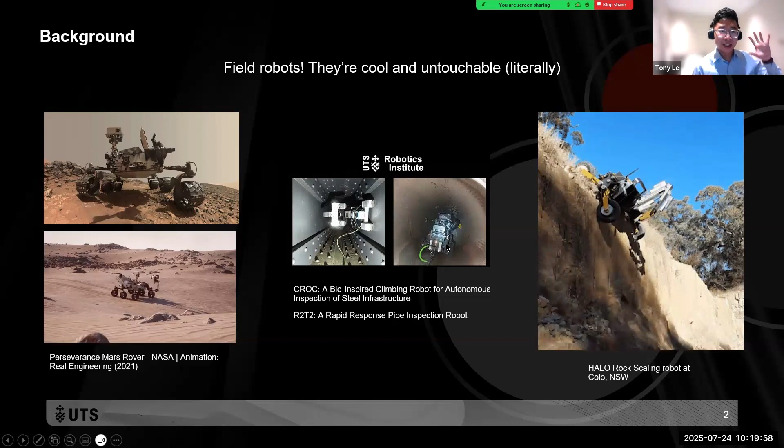Most of the time, it will come in some form of teleoperation at different levels, either directly controlling the robots or giving them more strategic commands. But since they are in the field, in the wild, we can't really be next to them because that's their whole point. And they're often in complex environments where it's hard to make assumptions about their surroundings, making autonomy even more challenging.

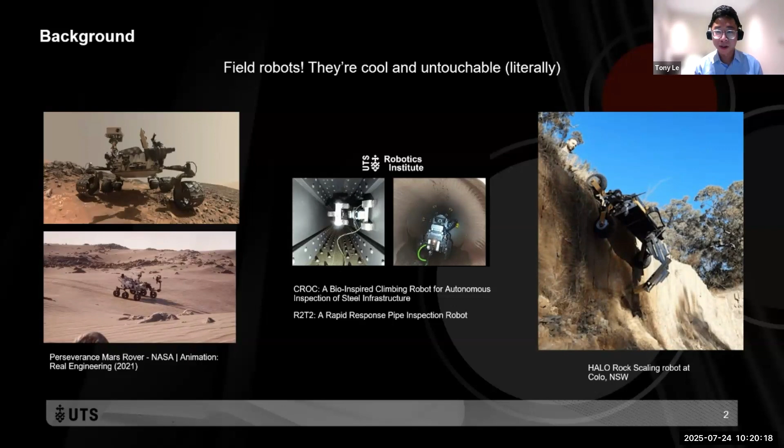That's why we need human-robot collaboration in these scenarios. So here are a few examples of some of my favorite field robots. The Mars rovers from NASA, of course, are insanely cool, on a different planet. And some of the robots that we've made at the Robotics Institute at UTS, that have gone inside the Sydney Harbour Bridge or inside sewers for inspections. And on the right is the Halo robot performing rock scaling.

That's the project that I worked on for 2 years as part of my PhD journey as well. So you'll see that rock scaling robot come up a lot in some of the examples that I'll be giving in this talk.

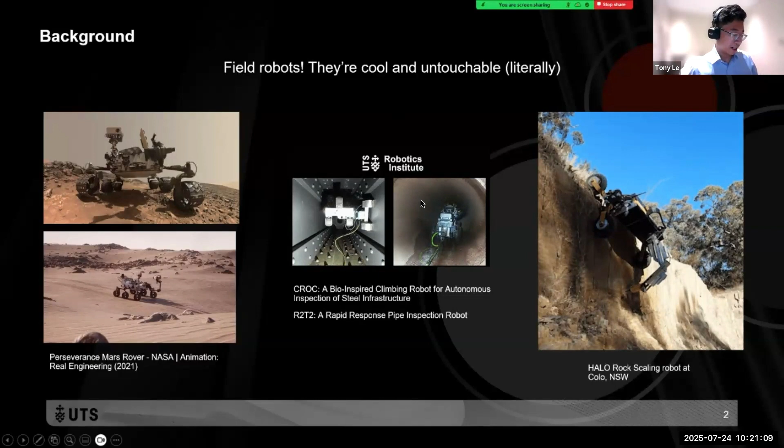Currently most robot interfaces use 2D screens - for example, this teach pendant, that's pretty standard for cobots. While functional, these interfaces can be cognitively demanding. And for cobots, especially when they are co-located with us, physical human-robot interaction can be quite effective, as the cobots are safe to be touched and move around. This contact between human and robot can become the medium for interaction, and it's quite an intuitive way to control a robot.

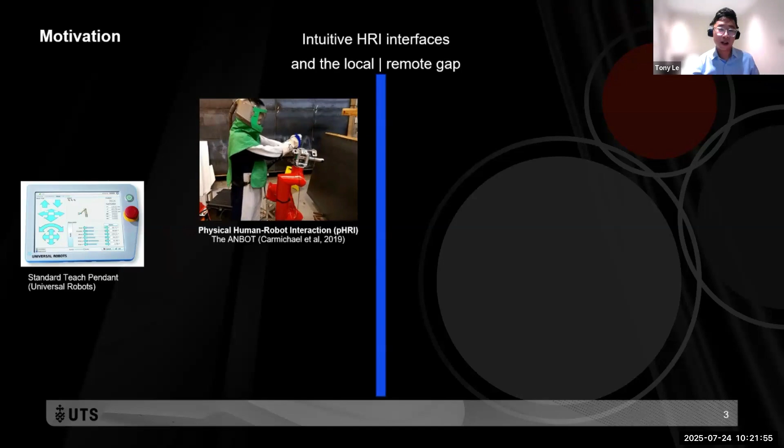Also for co-located robots, augmented reality technologies have been used to further enhance the feedback from the robot to the user, because AR allows us to overlay virtual elements in a 3D context, improving various tasks such as collision detection or waypoint settings. In research and in industry, it has been used extensively to enhance local human-robot interaction.

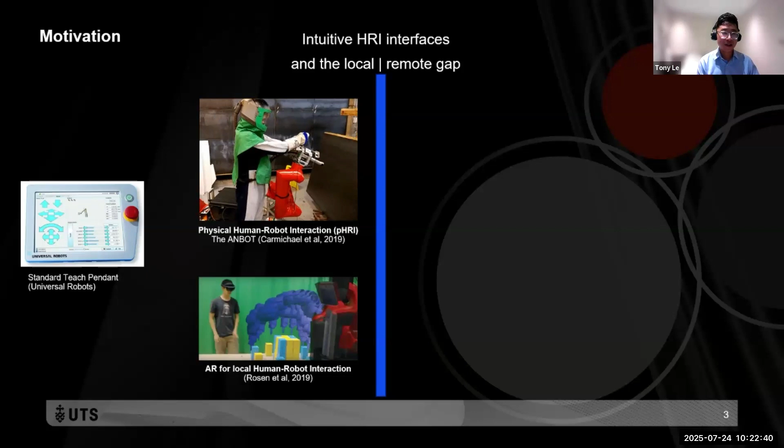But there's still a gap between co-located robots and remote robots, as when a robot is not next to you, there's a lot of challenges in visualization and user input. So people have tried various things.

This example here is a quite common technique for VR teleoperated robots. You can build a control room with different inputs, such as cameras or the pose of the robot, streamed back to the user. Or for humanoid-like robots with 2 arms and a head, one common technique is to directly stream the human input - their hand pose and head pose - directly to the robot, and then stream back the camera feed as if the human is the robot.

In this sort of setup, latency and the mapping is quite crucial for an effective teleoperation experience. People have also tried different mixed techniques, combining point clouds and 2D cameras and interfaces to control remote robots. But there's still quite a gap between a co-located robot and a remote robot.

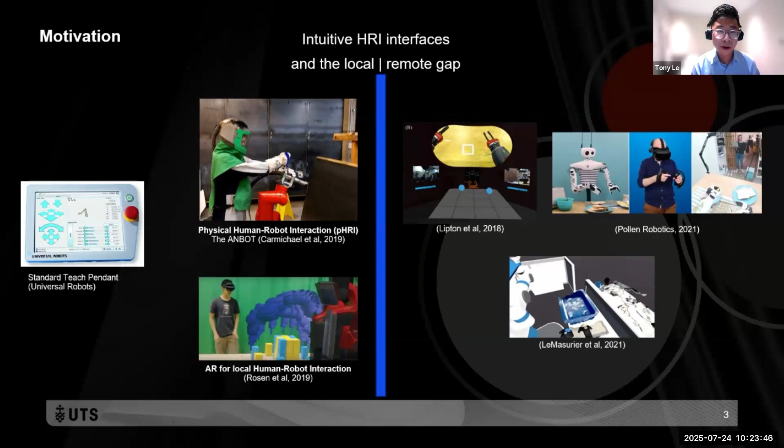Which brings us to the central question of my research: can the experience of interacting with a co-located robot be meaningfully replicated in remote robot teleoperation? To achieve this, we need to authentically recreate the remote environment and provide feedback for the user.

With XR alone, we can already enhance local interaction with virtual elements, and we can leverage users' visual spatial and proprioceptive abilities. So your movement in 3D space is mapped directly to your movement in the virtual space, and you can perform tasks more effectively.

But with a remote interaction scenario, it poses a different kind of challenge as well. To answer this question, I'm using the concept of presence, which is the subjective feeling of being in a different place than where you are, to evaluate the XR interaction designs.

So presence is built on a few illusions: place, plausibility, and embodiment. Place is especially a hard illusion to create because we are trying to recreate this remote dynamic changing environment in real time for the user. And with plausibility, it's the ability for the user to interact with the virtual environments with natural interactions that match the real world expectations of how things should work and operate.

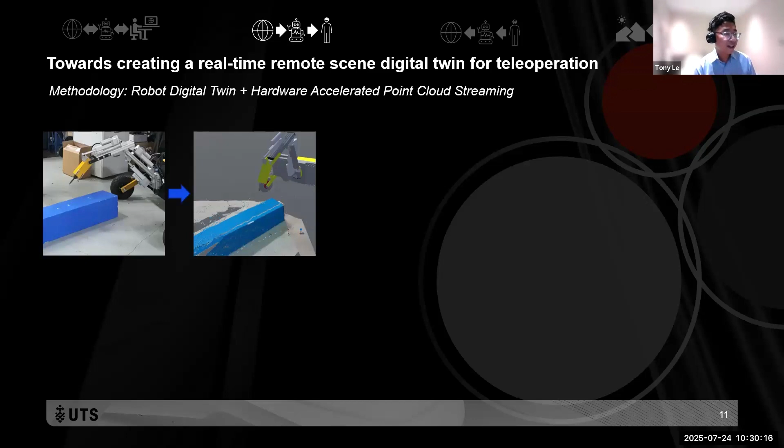Here's the pipeline that was used. We call this RealityStream. The main concept is to stream separate color and depth images through the network, compressed using JPEG. Then the images are reconstructed into 3D point clouds on the VR side.

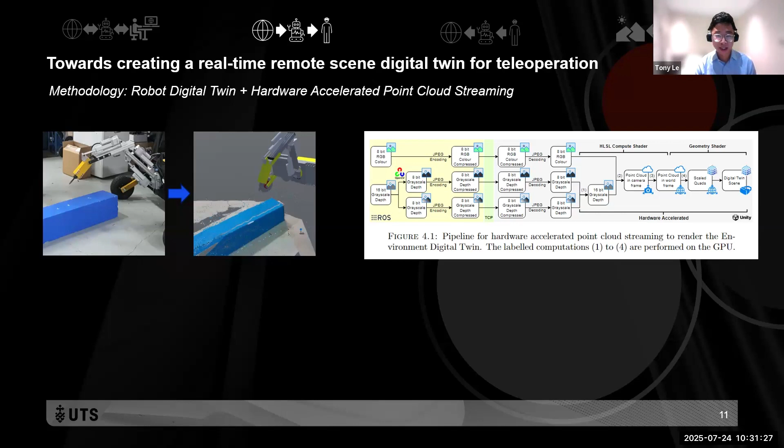The reason why hardware acceleration is necessary here is to maintain high enough performance for VR, because when you put on the VR headset, if the frame rate is lower than around 90 frames per second, 60 is where it's still acceptable, but anything below that, the user will start to experience motion sickness. So performance was really important.

Here's what the scene looks like with the point cloud. On the right is just me in my room waving, as I was testing this.

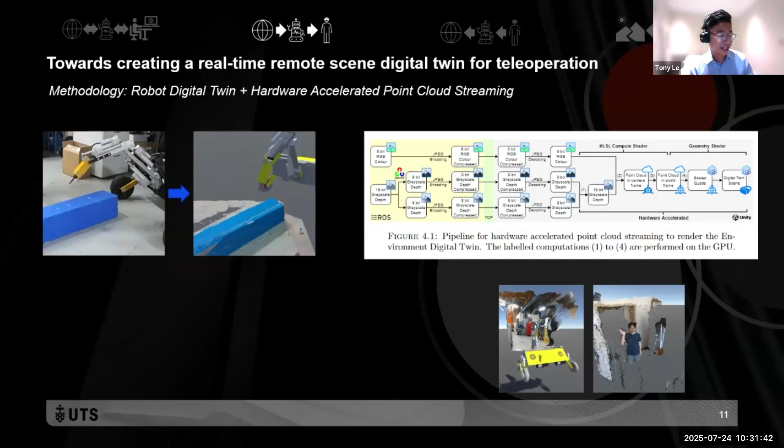Here's some performance metrics that we measured. This is with 2 480p point clouds streamed, because on the Halo robot we had 2 RGB cameras. Here we're comparing it with ROS Reality, which is a quite popular package used for streaming point clouds and rendering it into Unity. The latency measure is still pretty high, around 900 milliseconds.

As I mentioned before, when we did the user study comparing latency, it did have an effect on performance, but it is still within acceptable range, while we are achieving quite high performance, 121 FPS on this commercially available gaming laptop.

Apart from importing the robot digital twin model, subscribing to joint states from the real robot, and displaying the point cloud, there's one more step in aligning these two things. Obviously, if you have the model of the robot and you know where the camera is on the robot, you can't assume that will stay true all the time.

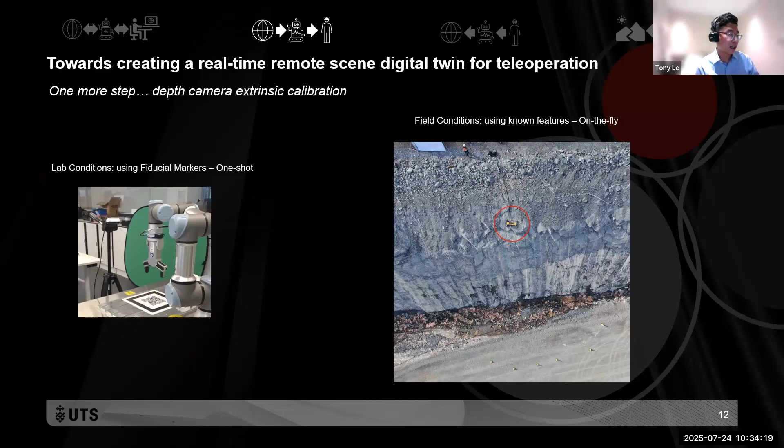The method used here uses the known shape of the end effector as the known features for calibration. It's quite ad hoc, not a complicated algorithm at all, just detecting the box shape of the end effector to calibrate the two cameras. There are more complicated techniques you can use as well, but the idea is, in the wild, if you have known features and assumptions about your robot, you can use that to help calibrate cameras and align your models.

And then the results on the right show you can have a calibrated scene where the point clouds and your model match and will be coherent for the operator.

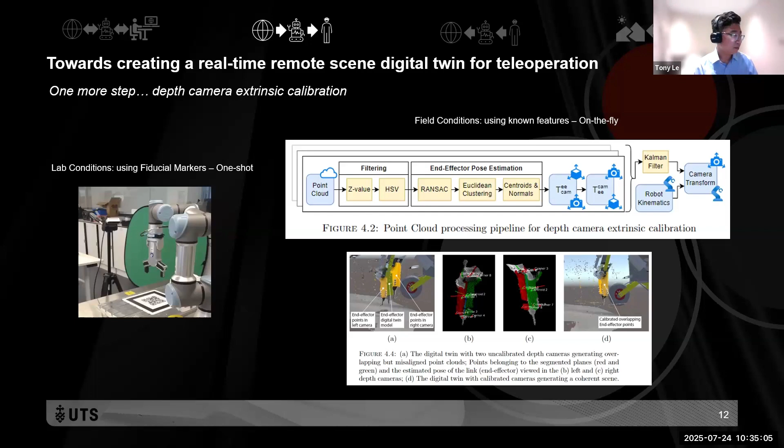We also did a user study to test out this digital twin generation. In this setup, the user controls the robot to touch the center of targets that we move around, controlled using a gamepad. On the right, you can see the settings we used with different kinds of aid provided for the operator.

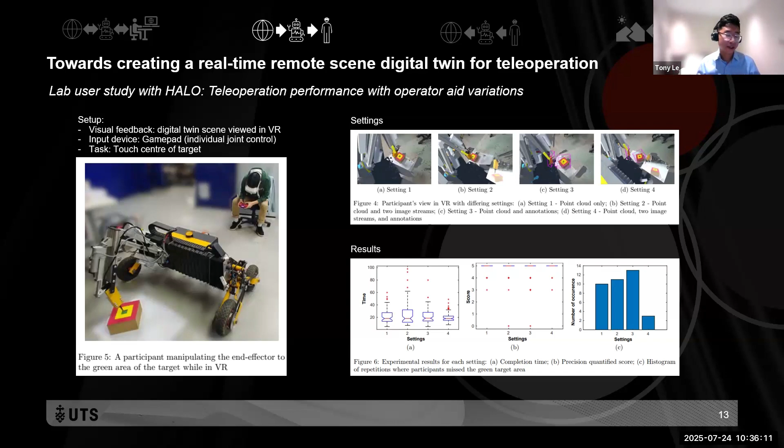That's either displaying 2D RGB images alongside the point cloud, or bounding boxes to help the user locate the target. What we found was the aid did not really help much - there was no difference in completion time, success rate, or points the participants were able to get. So that tells us that the digital twin generation with the point cloud was sufficient, and they didn't need to rely on the 2D images to perform the task.

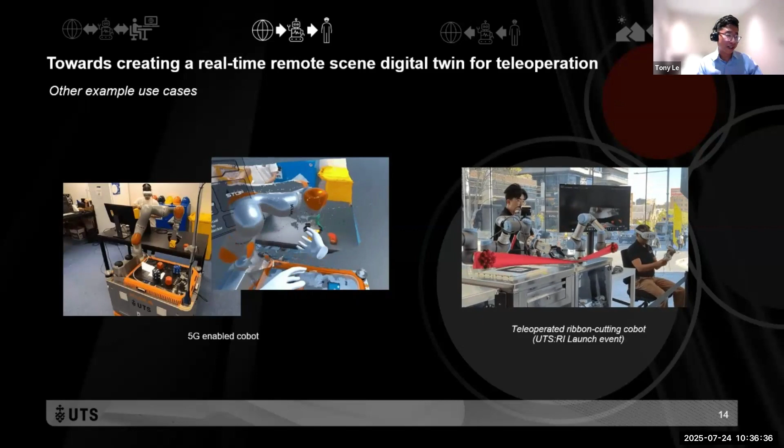Here are a few other example use cases of this method. It's been applied for this 5G enabled cobot, again with the point cloud streaming overlaying on top of the digital twin model. This was also used at the UTS launch event, where people at the event cut a ribbon, entirely relying on the visualization from the digital twin.

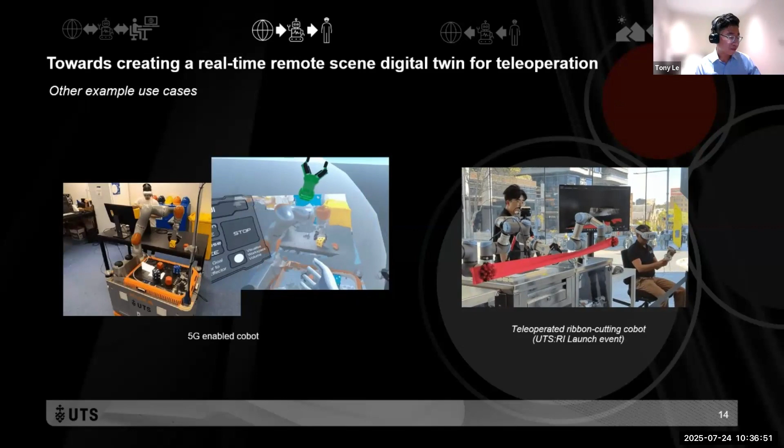So that was the information flow from the robot, collecting information from the scene to the human. How about the other way around? How do we facilitate cyber-physical interactions in this virtual environment? Again, I was inspired by pHRI.

The goal was to emulate physical interactions and provide visual, audio, and haptic feedback to signify affordance. Affordance is the relationship between what an object can do and a user's understanding of what it can do. With a physical robot, a cobot, when you grab and move it around, feeling whether it moves with your movement tells you whether it's movable. If it resists, you know the robot cannot afford that movement. But how do we replicate that in the virtual space?

In VR interaction or in the virtual environment, this sort of distance grab is quite popular. If you've played any VR games or interacted with an XR system before, you know this well. You can point at something with your controllers or your hands, or reach it directly and grab and move it around.

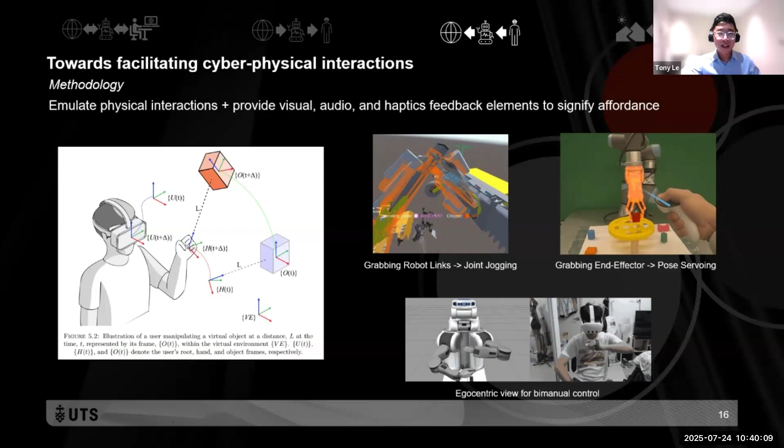We did another set of user studies to see how well it performs compared to PHRI for a co-located robot. In this user study, with the PHRI interface, the robot has an admittance controller, so the end effector is simulating a mass spring damper system. As the user grabs the end effector and moves it around, it will move accordingly using a force torque sensor at the end effector of the robot.

To isolate just the user input and not the visual feedback, we're using pass-through, done with a mixed reality headset. This pass-through view is like the perfect setup for visualization, where you can still see the robot in front of you. Even though technically it's not perfect like our eyesight, it's good enough to approximate that, so it helps us isolate the interaction itself from the visualization.

For this particular task, we asked participants to place foam blocks on top of each other. We measured completion time, success rate, and there were questionnaires at the end to measure subjective measurements as well.

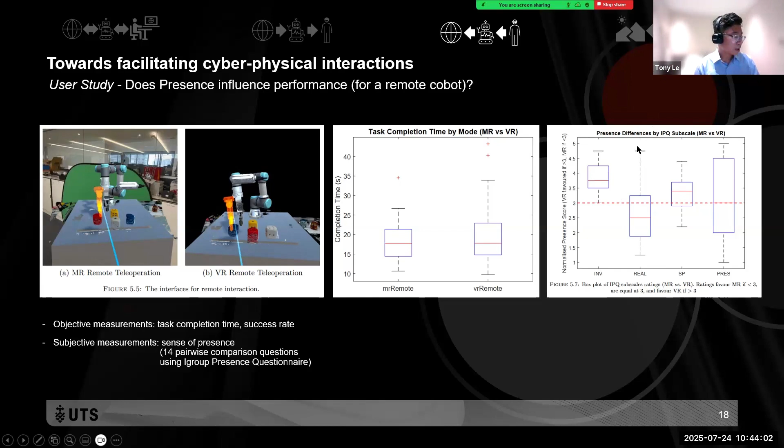It's pretty close. What we actually found was, as people felt more involved in the virtual environment, they took more time to complete the task, which is the worst performance because they were told to do the task as quickly as possible. I guess this is partly because when they could see their real environment around them, their movement in 3D space as they complete the task was freer because they can see they're not going to bump into any real world objects.

Whereas if they're completely immersed in the virtual space without any visual from their surrounding, they're more careful as they do the task, and that's why they took longer. And this is the same for spatial presence as well.

So those are the findings in lab settings, but does it work in real world settings? That's where the Halo robot and the rock scaling robot come in. If you're unfamiliar with mining and rock scaling, it's a task where every once in a while they have to send people to abseil with ropes.

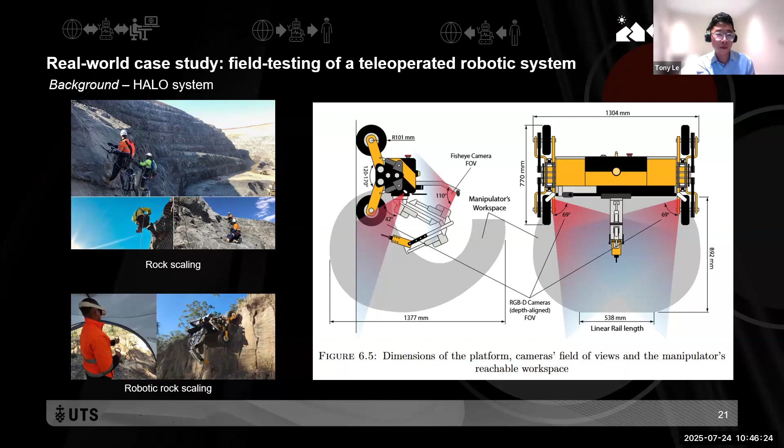So at UTS, we produced this prototype mobile platform to go over the wall, and it can be teleoperated by an operator at a safe distance away from the wall. This is the setup that we use on site. Everything's still wired through a local network, but the operator is located in the control station on the bench as the robot goes over the pit wall.

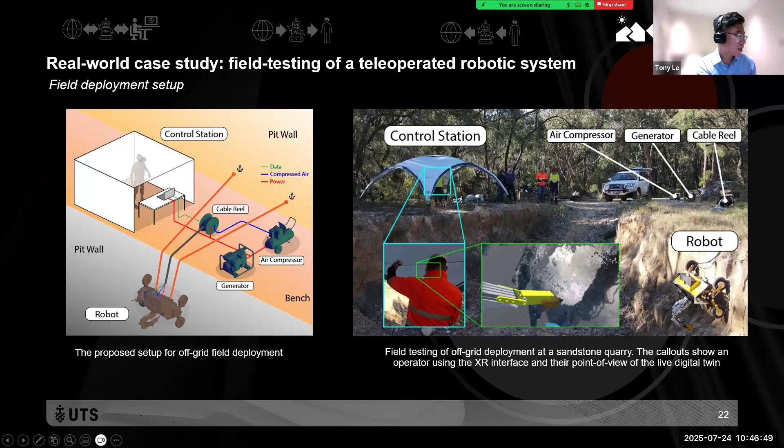All the visualization feedback and control modes were implemented, as I mentioned before. And this system was deployed and was operational on a real mine site in Western Australia.

Still, one key insight we learned was about switching between different views on the interface. We also had a fisheye camera, shown on the left, providing an overview angle. Apart from the point cloud from the two RGBD cameras, there was also just a flat RGB view from the cameras. Allowing users to switch between these methods was necessary - they asked for it.

Most of the time, they would rely on this visualization for bigger movements, and when they actually needed to get to a particularly difficult spot, they would switch to the digital twin and the point cloud for finer 3D manipulation. So allowing people to switch between different modalities is necessary.

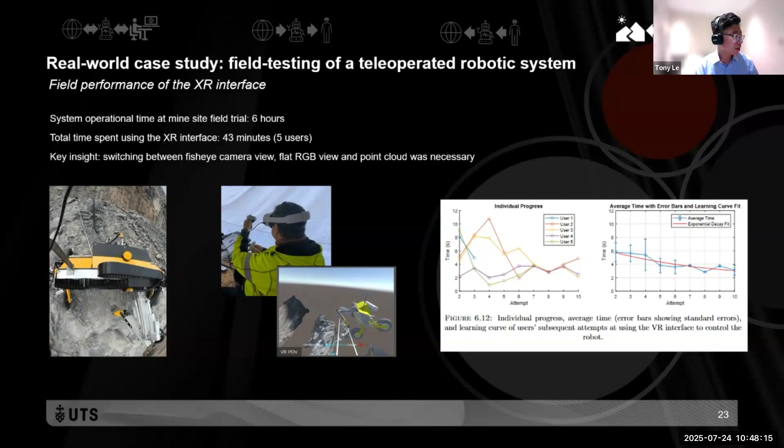To quickly summarize, so far we know that XR is significantly better than 2D interfaces for 3D manipulation tasks, and using simulations is very useful to control your user studies. This optimized point cloud real-time stream digital twin generation is comparable to line of sight for a specific task. However, higher presence might not necessarily mean better task performance.

Cyber-physical interactions can be designed to effectively emulate physical interactions, again inspired by PHRI, and this framework can be used in real-world settings. Giving end users flexibility in configuring their setup is ultimately always the right choice. So to go back to the research question: can the experience of interacting with a co-located robot be replicated in remote teleoperation?

Maybe, we're pretty close. But what more can we do? Some of the limitations with the current setup are with haptic feedback. Spawning from this work, I've further investigated using force feedback, which led to some collaboration with other ACC members, Daniel and Dylan. And the point cloud rendering still has a bottleneck at higher resolution of the point cloud.

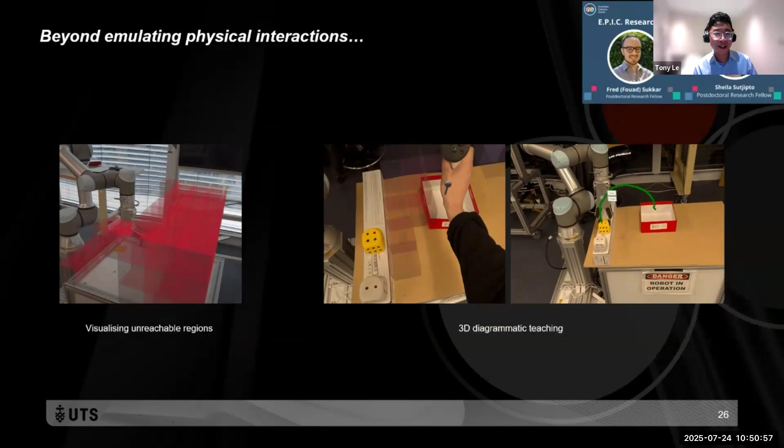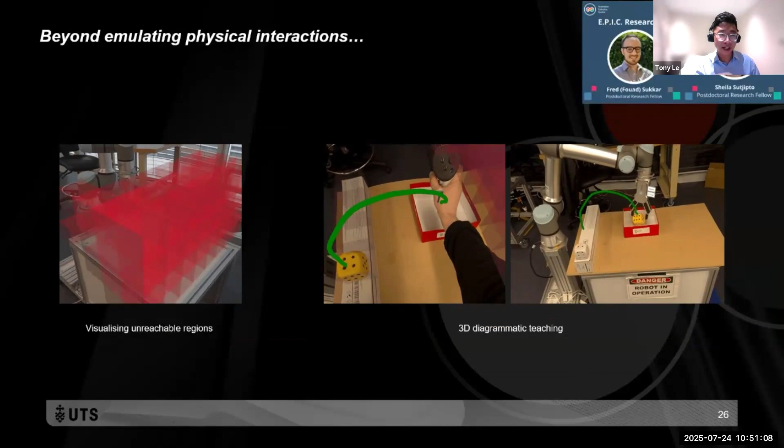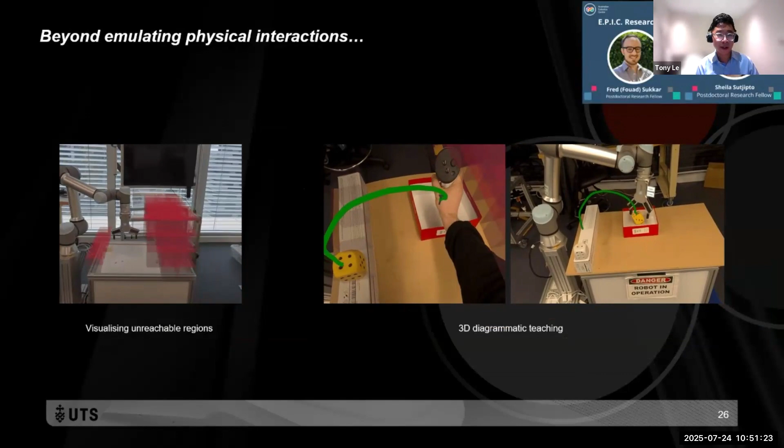And also going beyond emulating physical interactions is some of my current other work in collaboration with other ACC members. Within XR, especially in mixed reality, you can show information that you cannot show in real life in physical space, such as the robot's unreachable regions in 3D space, or have other methods of controlling the robot, like drawing in 3D space and having the robot follow your planned trajectory.

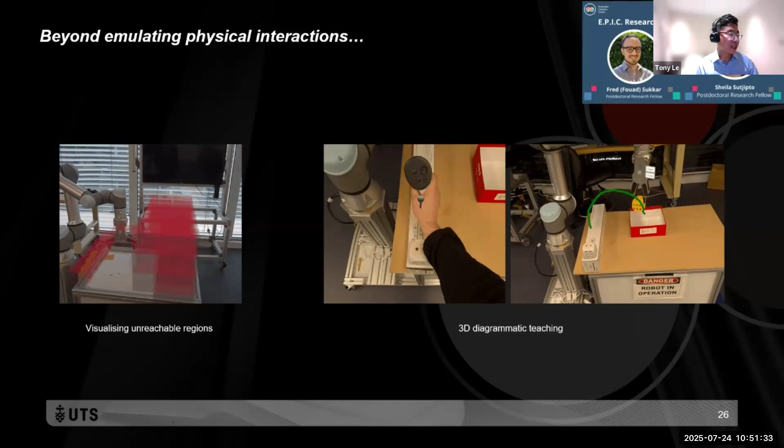So these are some other methods of visualizing information from the robot, cobot especially, and then programming it more intuitively using XR.

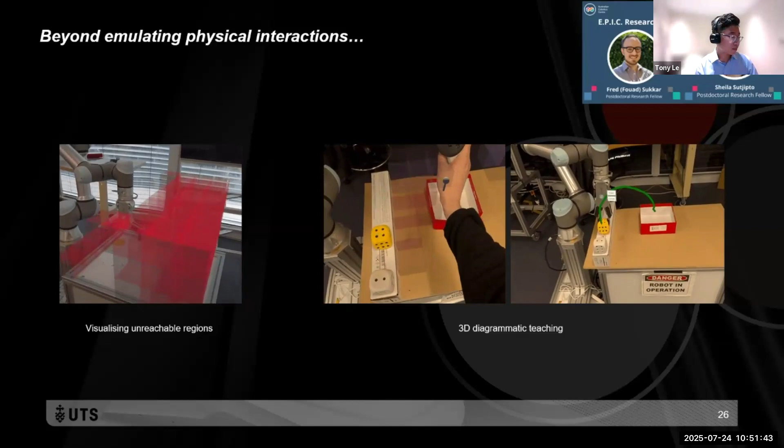Okay, that's the end of my talk. Here's an open call for collaboration. At the moment, I'm in the process of releasing all that work as a package called XR-Vis, Unity-based, MetaQuest native, so it can be installed on your headset as like an RViz alternative but in XR. So it's called XR-Vis for ROS 2. It's not fully released yet because I have to fix up all my spaghetti code, but if you want to try a version, feel free to contact me for it. Thank you very much for listening.